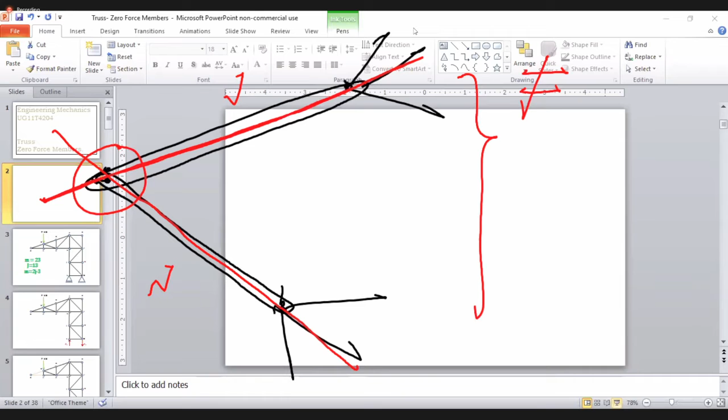If you want to understand it with more detail, suppose I have one element over here, another connected over here. Say this is in tension and has a force in this direction, and this is also in tension and has a force in this direction. Then both of them, through a parallelogram of forces, we know will give a resultant which is non-zero. That means the sum of the forces at this joint is not zero, meaning this point is not in equilibrium.

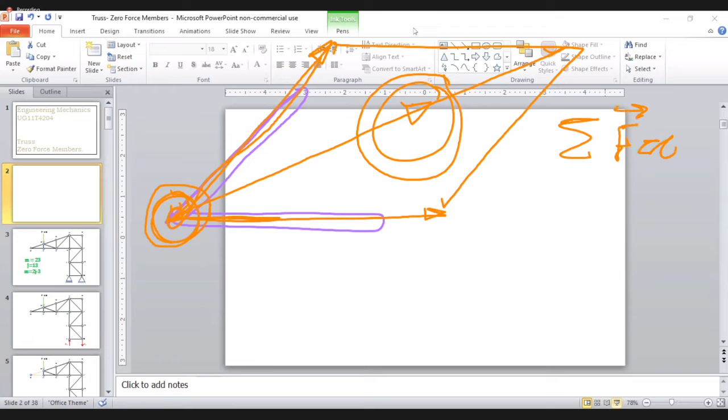Now, when a truss is taking a load and is supported, each joint overall is in equilibrium, and each separate part of it also is in equilibrium. As a result, one should think: why can the truss remain in equilibrium without the sum of the forces being zero? It simply cannot, because equilibrium states that sigma of the forces is equal to 0. There is no exception to that.

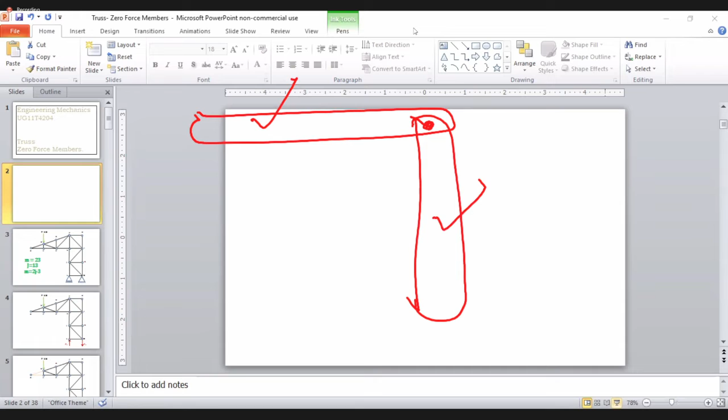Now sigma of forces can become 0 if and only if forces in both of them are 0. So F1 here is 0 and F2 here also is 0. Maybe both of them are in compression, maybe both are in tension, maybe F1 is tension and F2 is compression, or F2 is tension and F1 is compression, whatever that may be, if they act at one point, their sum will not be equal to 0 unless F2 and F1 both are 0. So in any truss, if we come across any two members meeting at one point or one joint, where there are only two members, then this is 0 and this is taking a 0 load, and both of them are zero force members. This angle can be anything.

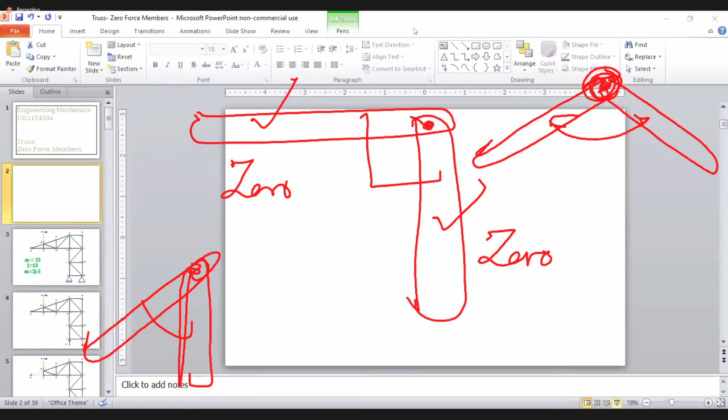It may be acute angle, right angle, or obtuse angle, whatever. If at any joint there are only two members meeting, then both of them are having a zero force.

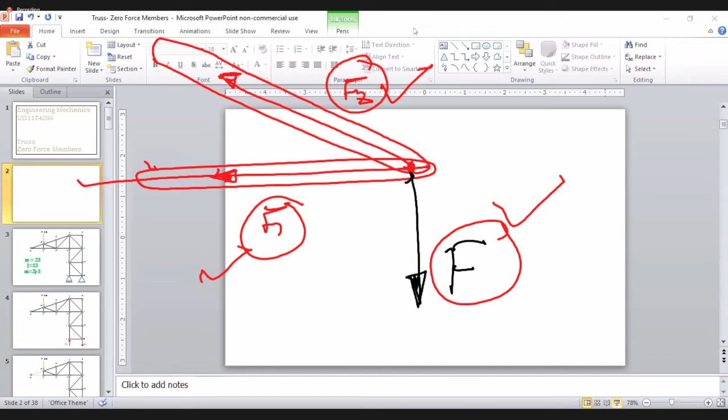But suppose here there is a member and here also there is a member, and at the joint there is an external force acting like this, say external force F. Then obviously, if F1 is acting over here, and F2 is acting over here, then F2, F1 and F, all three of them may be non-zero and they can create an equilibrium here.

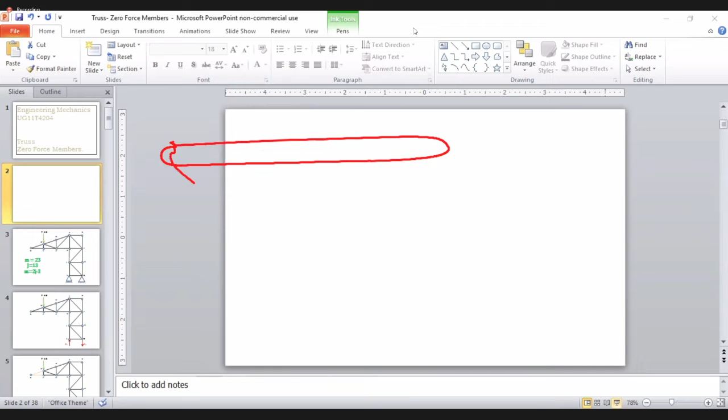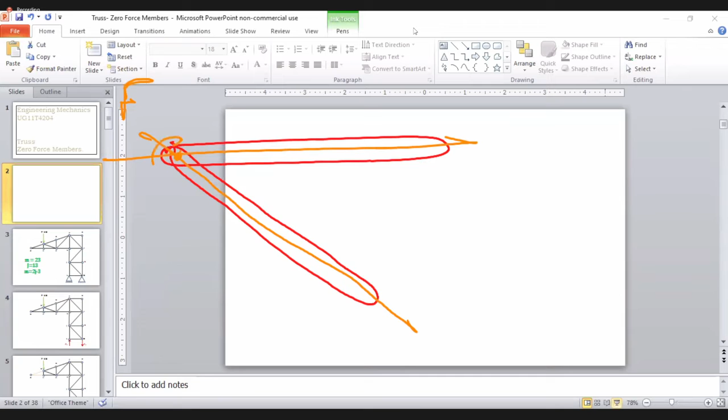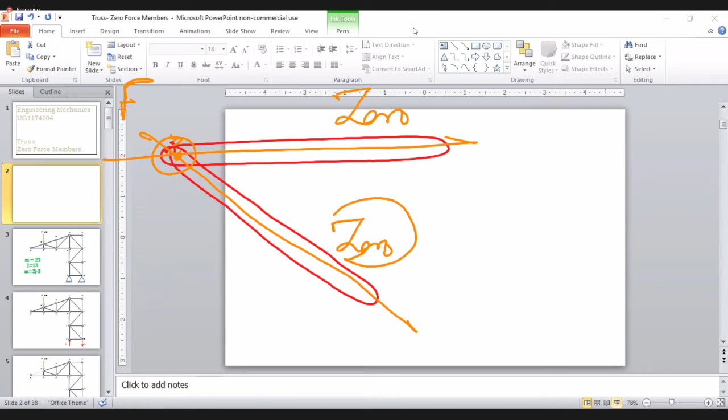We have seen this while studying the method of joints. So the final conclusion is that if two elements are meeting, element or member, both are same thing, and over there if there is a force acting, then this and this are non-zero. But if two members are there and on their joint there is no external force acting, then this is a zero force and this is a zero, because unless and until both are zero, sum of the forces over here will not be zero.

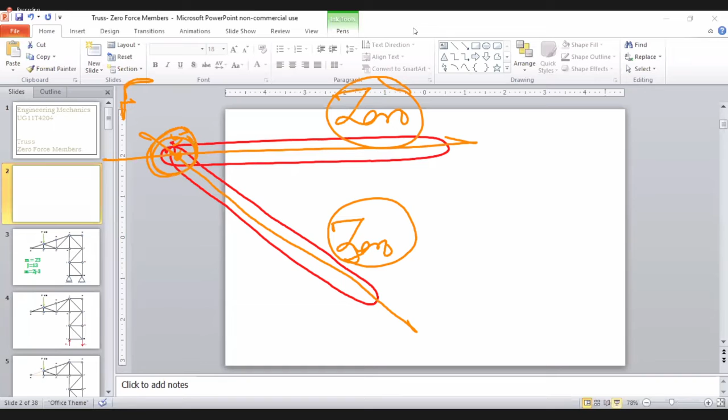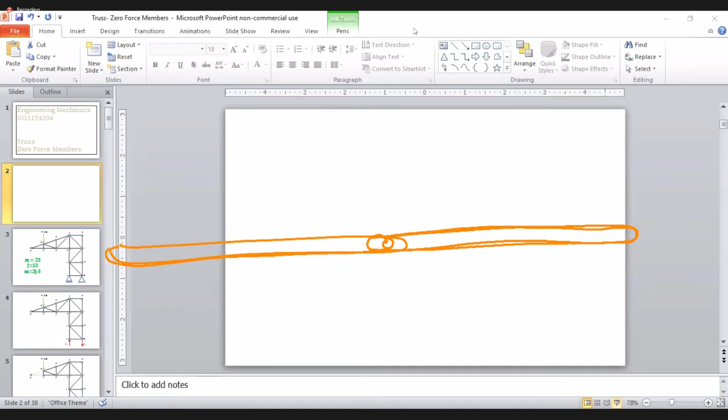Again, we have another situation. If we have two elements meeting and both of them are in a straight line, then it may so happen that this may be in tension in this direction and this may be in tension in this direction. In that case, both of them are non-zero. For angle 180 degrees, that does not apply. But any other angle other than 180 degrees, when they are not in a straight line, both of them has to be zero.

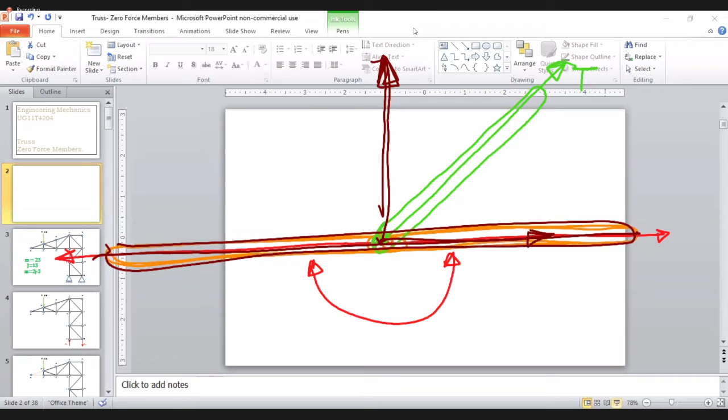But now when both of them are in this condition, and then if we apply a joint of this third element, if we assume that there is some tensile force here also, then that tensile force will have two components. One component perpendicular to the axis of these two elements and another parallel to that. Now this component which is perpendicular to the two inline members will not be nullified by force over here or here.

As a result, the sum of the forces at this place is again non-zero. And to make this particular force zero over here, this component has to be zero. But this is nothing but a component of this, and so this has to be zero.

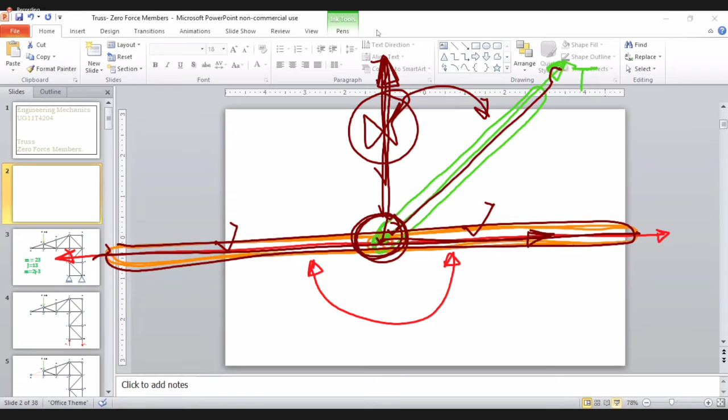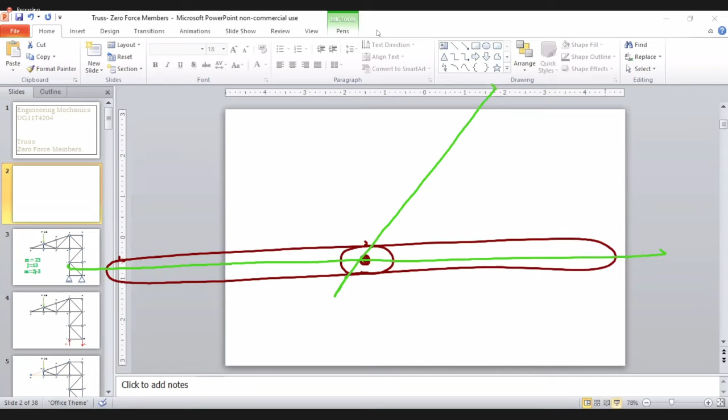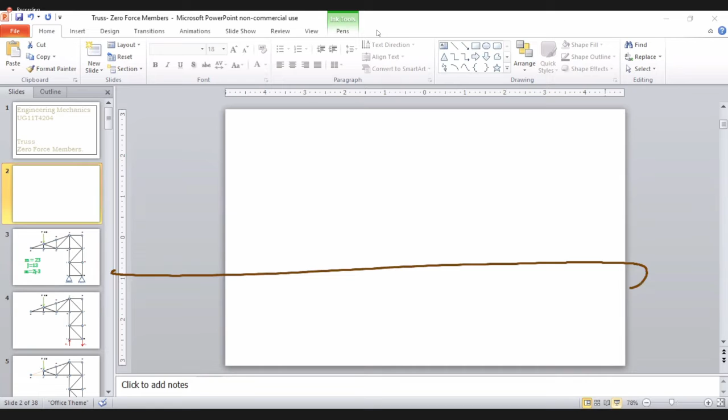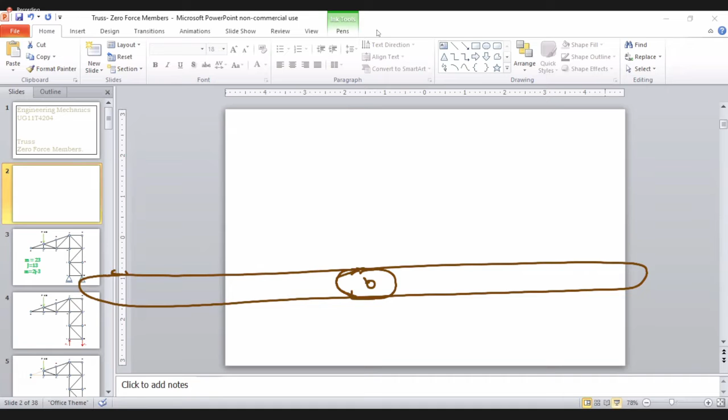Let me put the whole thing to you again in a different way. We have two elements in a line. Both of them have some force. It is obvious that both of them must be either in equal tension or equal compression. Now assume that here there is... they are in one straight line, and here we have a third one. Now let us say all of them are having some non-zero force.

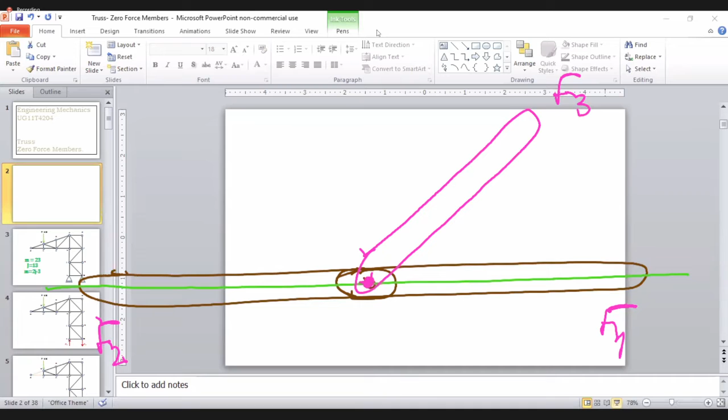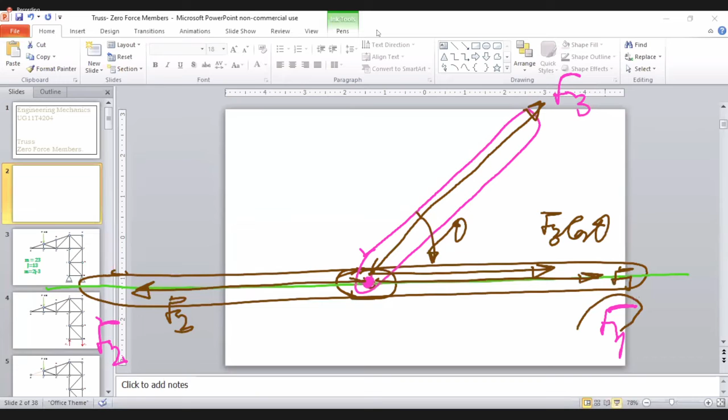Here there is F1, this is F2, and here is F3. To make the sum of all the forces 0 over here means sum of the x component also is 0 and the sum of the y component also is 0. Let us say here this F3 is acting at an angle theta. So F3 will be having a component F3 cos theta. This is F1 and this is F2. We can see that F1 plus F3 cos theta minus F2 is equal to 0.

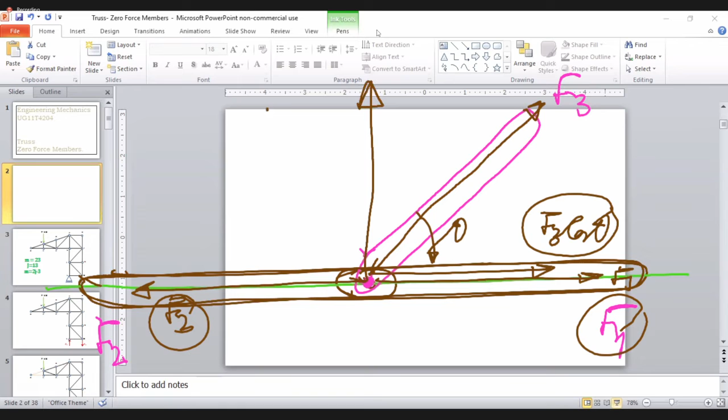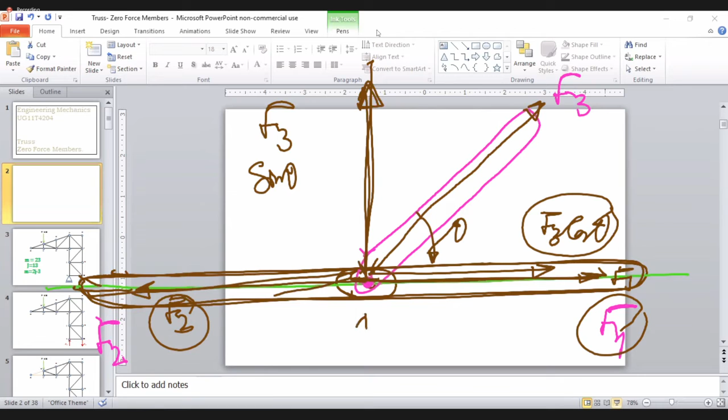Then we can have a sum of all the components acting over here is 0. Then F3 also has a sine component here. It is in the y direction. Now F2 and F1, they are in a direction perpendicular to this F3 sine theta. So they don't have a component in that direction. For example, if force is in a y direction, then it doesn't have an x component. If force is exactly in the x direction like our F1 and F2, it does not have a y component which will nullify this. As a result, we got to believe that this entire F3 sine theta is 0.

If F3 sine theta is 0, theta is here, we know sine theta is not 0. So F3 has got to be 0. So this is F3 which is 0.

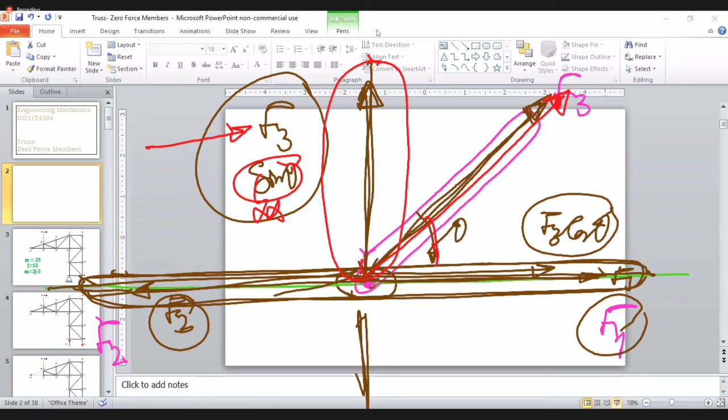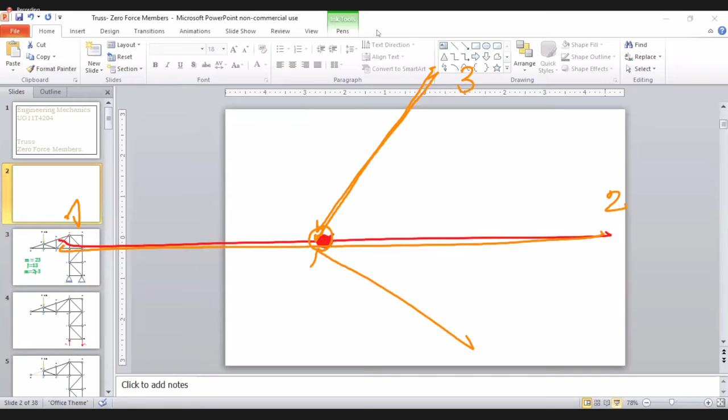So now we are convinced that there are two members of a truss in a straight line, and if there is a third member connected to the same joint, or rather there is a member 1 and a member 2 in a straight line, and the third one is not in the straight line with them, it may be like this, or maybe it is in this direction, or this direction, or this direction, or this direction. Not all of them, of course. If three members meet at one point, out of which any two are in a straight line, then the third one carries a zero force.

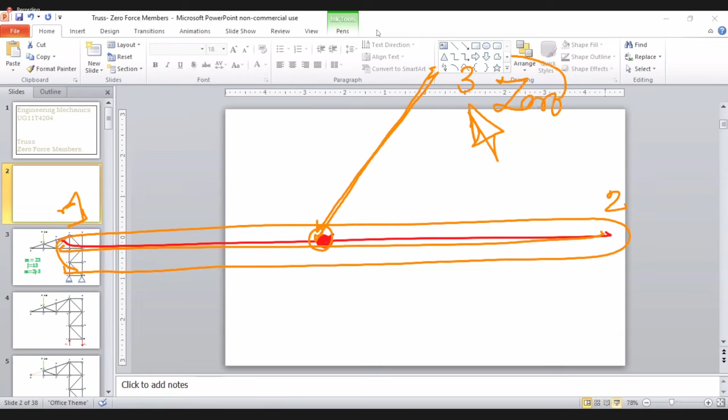There is no other way, because without this condition, without this being zero, sigma of fx or sigma of fy at the joint will not be zero, which is not acceptable. That has to be zero in order for a truss to remain in equilibrium.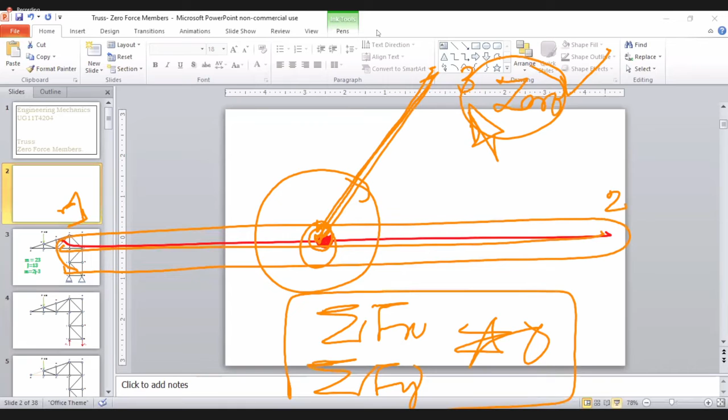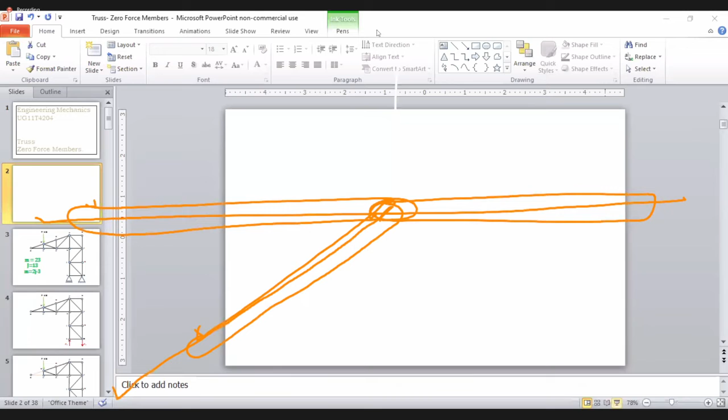Again, there is one more rider over here. Here are three elements acting. These two are in a straight line. This is making some angle, and here there is an external force acting over it. In that case, this is not zero.

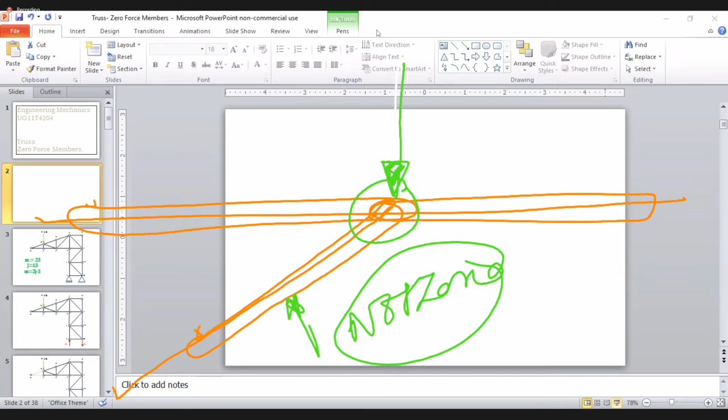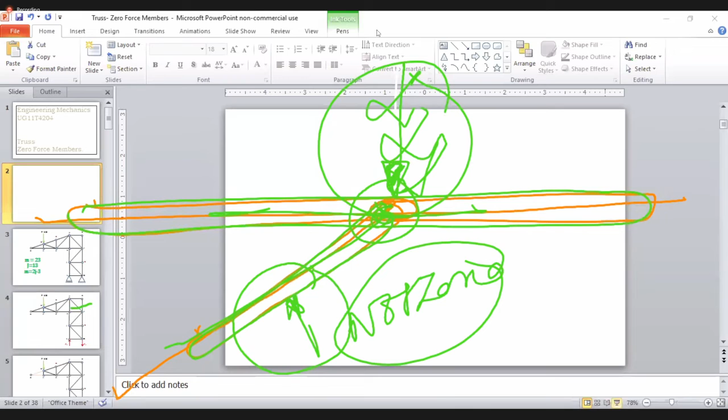Our understanding is that when two elements are joined at a place in a straight line and a third element is also connected there, then the third element will be zero if and only if there is no external force acting there. This is what today's argument is, and this is the last time we are touching this.

Now we will go to our problem. This is one truss where there are total 23 members. You can count AB, AC, BD, CE, BE, and there are 13 joints, and M is equal to 2J minus 3. That equation is balanced, so this is a statically internally determinate truss.

Now our task is to find out what are the zero force members over here. Look.

I request your answer. Ronak Bhadarka, are you in the class? Bhadarka, good, I like your prompt response. Now, can you identify any two zero force members over here?

Excuse me sir, I'm not able to see any figure over here, sir. I'm just able to see a green circle on the screen. Green circle on the screen? Yes sir, there is no figure on the screen. Okay, it does happen sometime.

Now I'm sure all of you are able to see. Yes sir, yes sir. Now, very good, it is there. So now you know it's a very smart looking truss. Such structures are in a crane or many places.

Now have a look at this and tell me, do you find a single joint where two elements are meeting and on that joint there is no external force acting? As such, there is only point A. Yes, very good, very good. So Cadet, you want to say, I also agree with you.

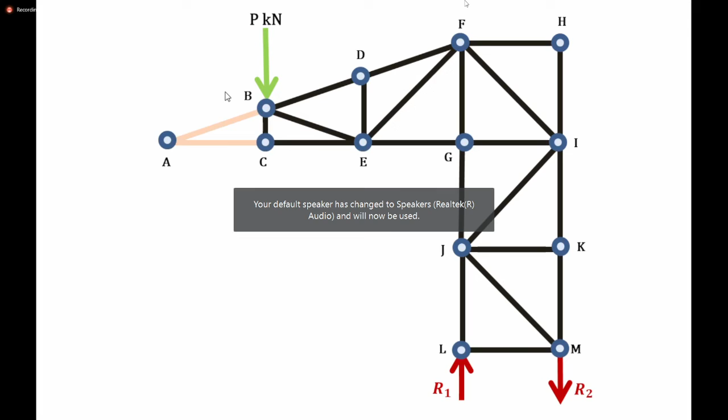Have a look. At joint A, there is no force acting, and AB and AC are meeting there. So both of them are zero. At least, they are zero now. Had there been a force acting over here, they wouldn't have been zero. So under this present circumstances, AB and AC are zero element forces. I am removing them, putting a faint pink color here. This is as good as they are not here.

Now again think, is there any further joint, which is point L? At L there are two, but there is external force acting over here, so it cannot be zero, sir. Got it?

Sir, so H? Yes, you are right, H. But before we go to H, note one thing. What you should learn is AB and AC are zero force elements. They are not there at all physically. I mean, they are there, but they are not giving any force. As a result, CE and CB are also zero force elements.

Why? Because these don't exist. The truss is this dark line only, and at C, there is no other force acting. As a result, we can confidently say now that BC and CE are also zero force elements. Do you get it? When there is a truss like this, we don't realize it. C has a 1, 2 and a 3. But once we remove AB and AC, we can come over here, it becomes CE.

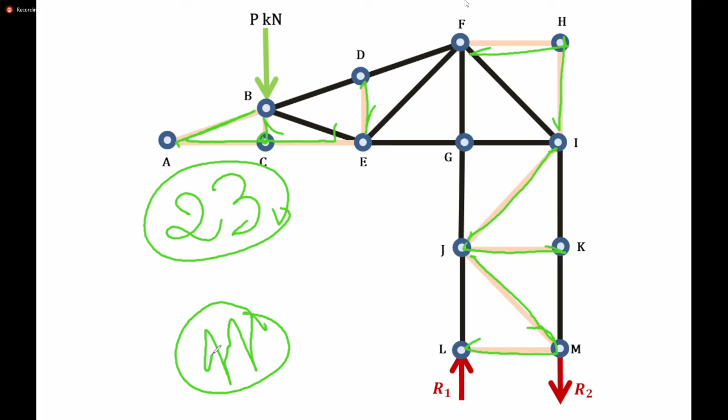Are you convinced, dear friends? Have you understood this? Okay, do you have any questions about it?

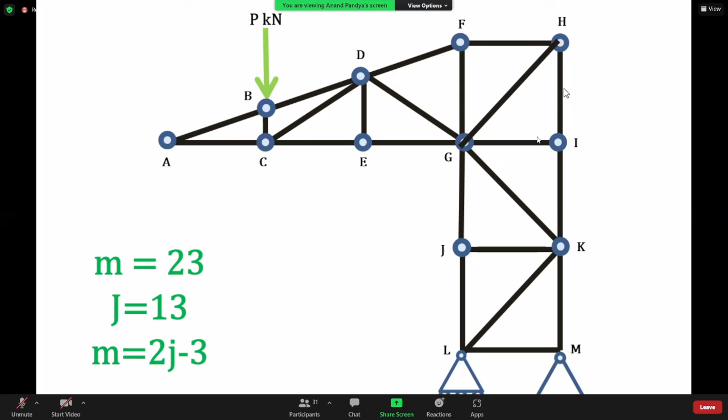See, Prathamesh Jadhav, you are writing A. A is a joint, A is not an element. A is a joint, you should say AB and AC, they are zero force elements. You should say that. So very obviously AB and AC are zero force elements.

Further, what are the others that are zero force elements? Tell me. Animesh, I admire your answer, but write all of them. Give a complete answer, that AB, AC, then PQ, RS, VW, whatever you find over here. There are many. The earlier truss had 11 zero force members. How many are here? It will take some time, you will need at least minimum 5 minutes to think, maybe 10. But once you give a reply, you give reply that this has the following 7 zero force elements and they are this.

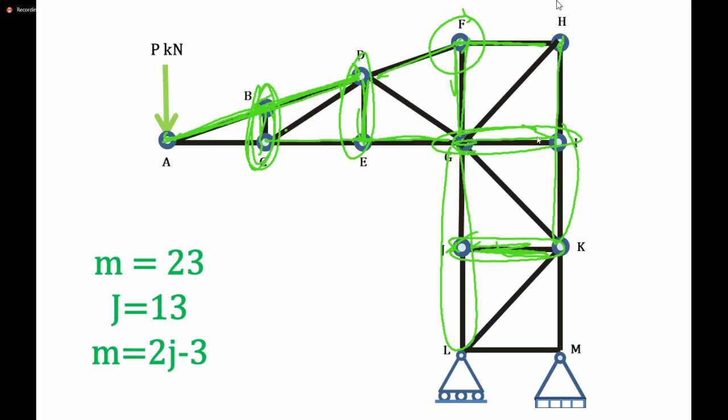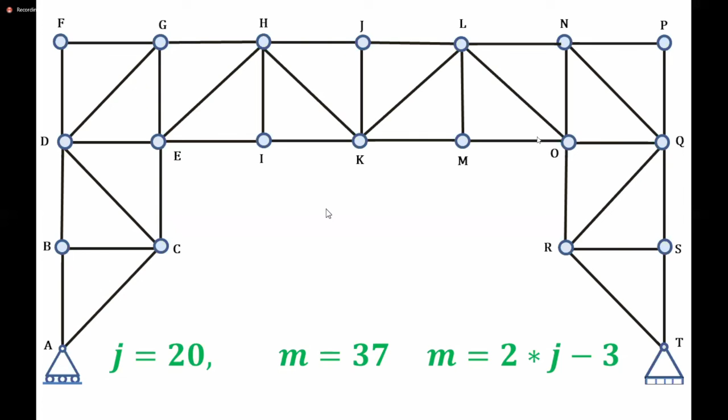So on and so forth, dear friends. Today I have added some more notes on Moodle. Numerical 1 and numerical 2 are placed over there. Tonight I will put this PPT also over there in PDF form. So kindly have a look at it and increase your thinking about it. In the next class we will study this truss and find out zero force elements. It is pretty easy, not at all difficult.